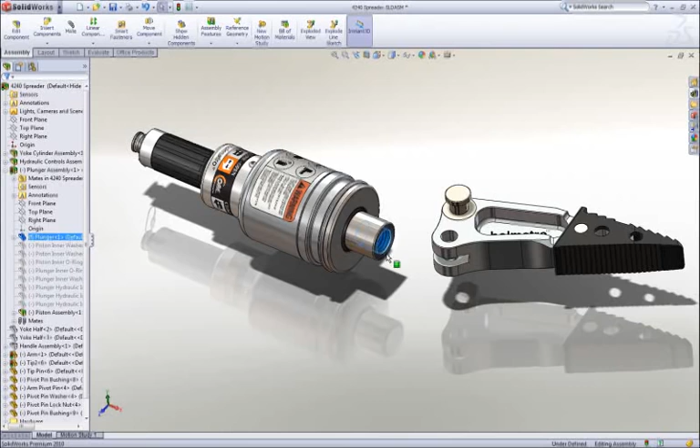We'll create a part, assemble several parts, and create some drawings. We'll start by designing a new rod end part to connect the piston rod to the spreader arms.

The basic building block of a 3D solid model is a sketch, and sketching in SolidWorks is extremely easy and intuitive. Using a mouse gesture, I get access to my most commonly used commands. Draw a slot, add some dimensions to establish its size, and then drag the center of the slot onto the origin to locate it.

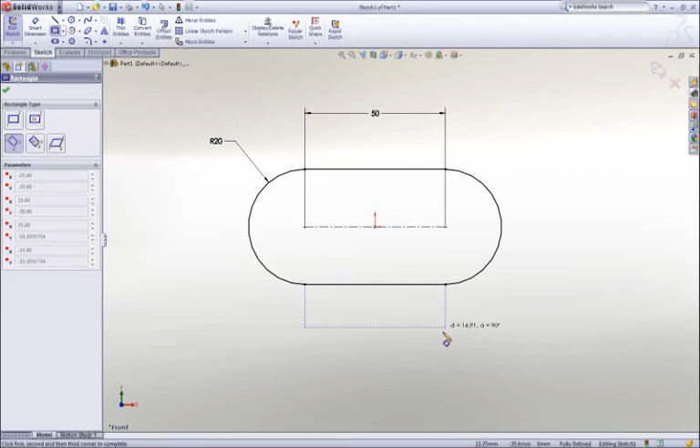Next, a rectangle is drawn using one of the many sketch tools, and then we will add a couple of circles to hold the link pins. The two circles should be the same size, so a quick window selection reveals a pop-up toolbar and an equal constraint is added to lock their size together.

Notice that as I work, all of the commands and tools are right at my cursor. We call this our heads-up user interface, which is designed to keep your focus on the screen to make you more productive.

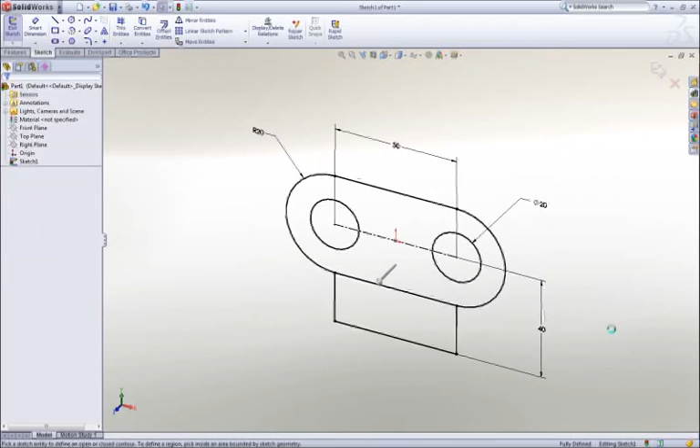Now that this 2D sketch is finished, let's make it 3D by extruding it. It can be extruded in either direction, or in this case we will extrude it 40 millimeters about the midplane.

To smooth some of the sharp corners, we can add some fillets. Their size can be graphically manipulated on screen, or we can key in a dimension to add some precision.

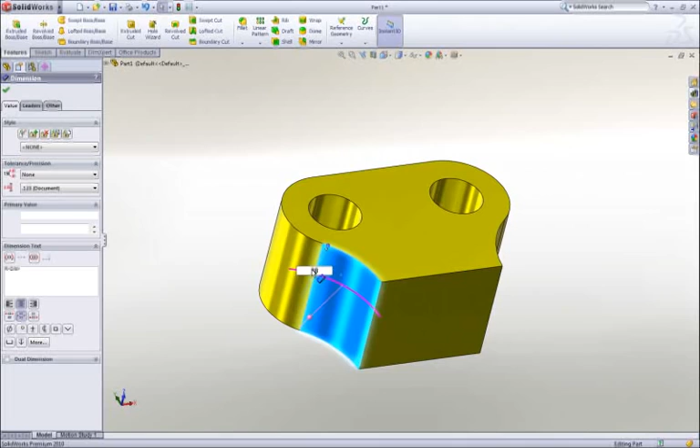Let's add a pocket to the center of the part to accept some links. This time we will use a center point rectangle to capture symmetry while we sketch, and a dimension to control its size.

Using instant 3D technology, we can add material by dragging the sketch away from the part, or remove material by dragging into the part.

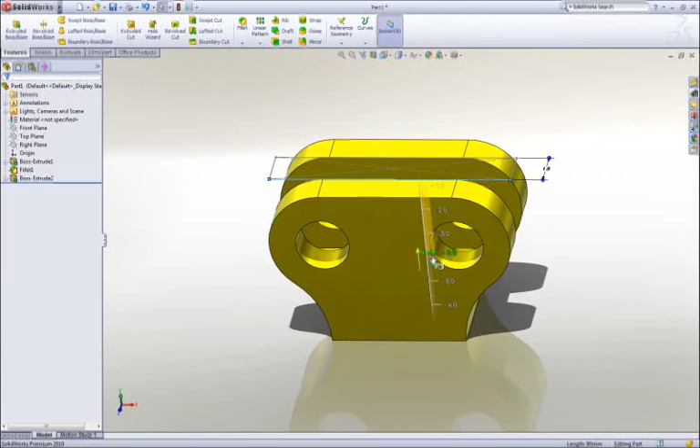The sharp corners at the bottom of the pocket can be rounded by adding another fillet. 2 millimeters would be good.

Finally, we can ease the outside corners with a chamfer. Using the on-screen feature callouts, we can easily control its size while we create it.

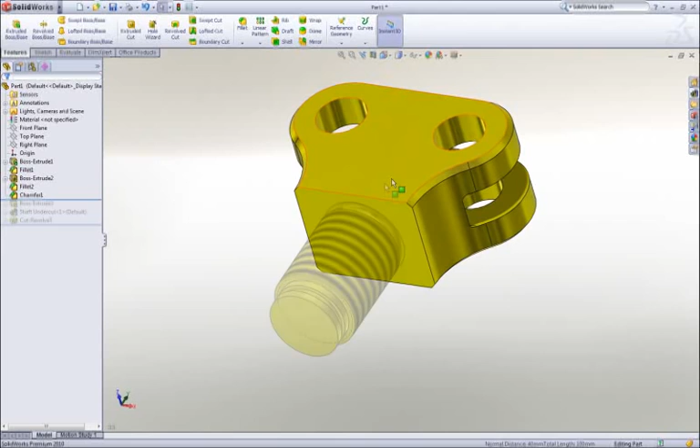Now that you have the hang of it, we will jump ahead a couple features and add a tapped hole at the bottom using the hole wizard. Gone are the days of looking up hole data, because all of the hole types, standards, and hole sizes are available. Choose the hole parameters, locate it, and SolidWorks takes care of adding all of the proper information to define the hole.

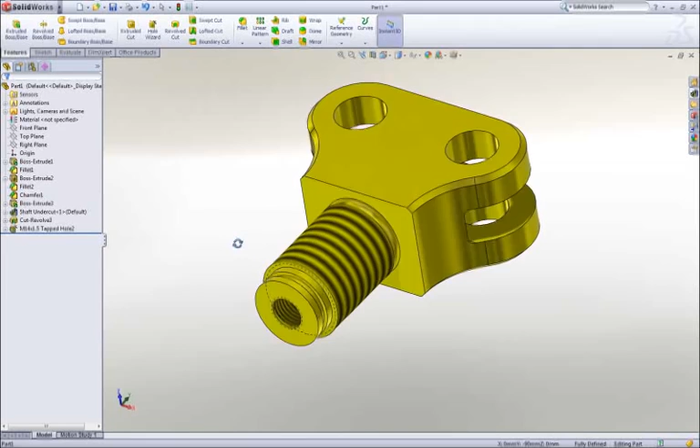Let's leverage our previously created chamfer by dragging and dropping it onto the bottom edge to make a copy. The part looks good, but maybe a couple of changes would help to refine it.

Changing the dimension value changes the geometry, and using instant 3D technology, dimensions can be dragged and we get real-time feedback of our change. It's important that we fully describe our part beyond just the geometry.

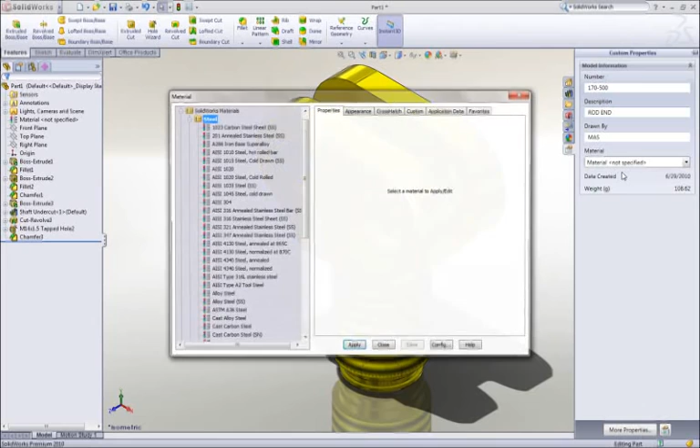Properties such as part number or description can be added and leveraged later in the drawing title block and BOM. Materials can be applied from a list of favorites or from a broad database of materials.

All visual and mechanical properties are applied. Notice that the weight of the part has been updated to reflect the new material.

To document our design, let's create a drawing. SolidWorks displays the default views of the part in the View palette. We simply drag a view onto the sheet, then we can create any desired projected views, including an isometric.

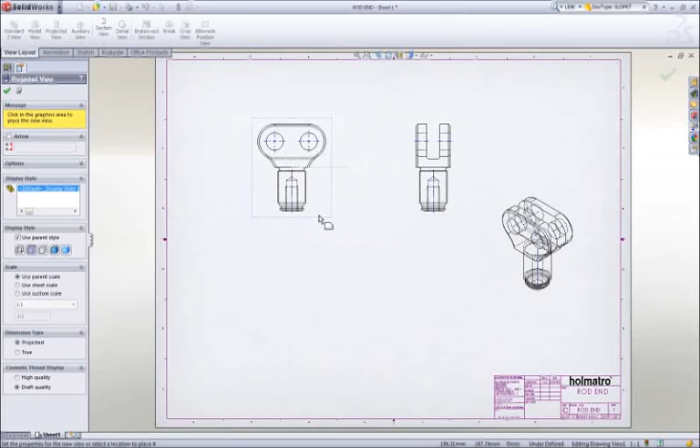Hidden lines can be removed or views can be displayed as shaded. For this part, it would be desirable to create a detail view of the area near the bottom for clarity.

Adding dimensions is simple. All of the dimensions that were used to create the part are available to be placed on the drawing. Since symmetry was used during design, we can add a couple of dimensions to locate the round boss at the bottom. The Rapid Dimension Manipulator appears to properly place and space the dimensions at even intervals.

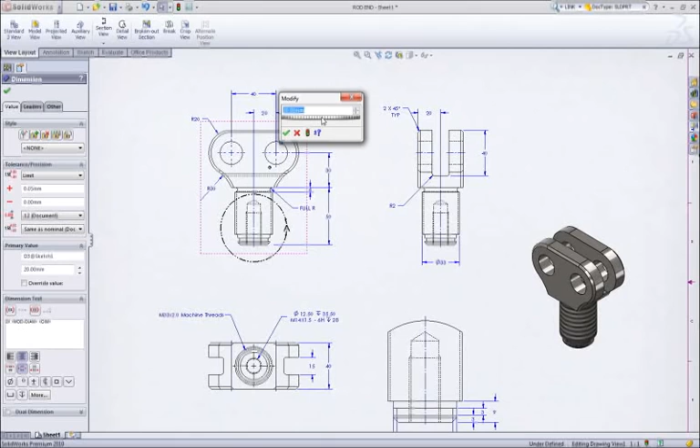Selecting a dimension, we are presented with a dimension palette where we can add more definition, such as tolerancing or formatting. These 20 millimeter holes will not accept the 22 millimeter pins we will be using. No problem—making this change directly on the drawing updates all of the views and changes the part as well.

Let's move on to do some assembly work, and with SolidWorks it couldn't be any easier. For our rod end, simply drag the round boss and drop it onto the cylinder rod. This adds a concentric assembly mate between the parts. To position it along the axis, we can drag the edge of the rod end to the end face of the cylinder rod.

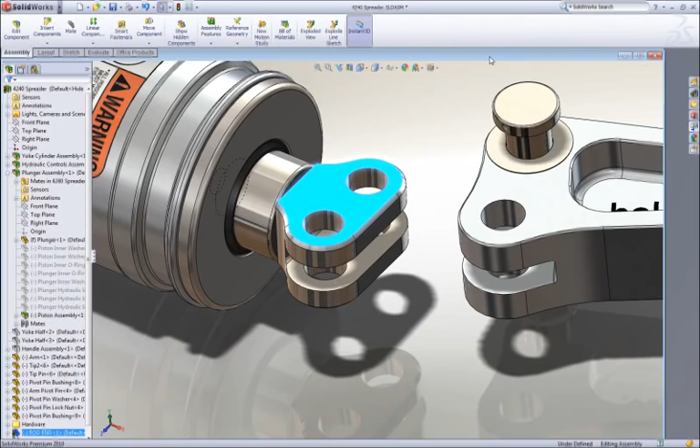This adds a coincident mate. Next, we will add a link to stop it from rotating. To find this part, we enter 'link' in the search assistant. SolidWorks not only returns components with 'link' in their file name, but also digs into the part properties to find the term. As before, we can drag this link from the search pane and drop it on a circular edge of the arm to locate it, then using the same drag-to-mate technique, hook it to our rod end.

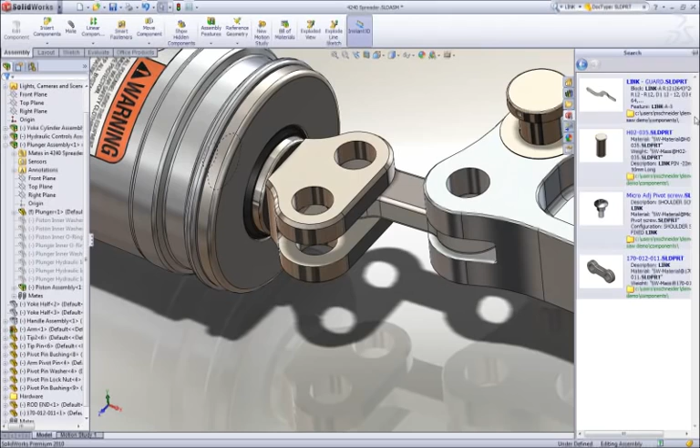From the same search pane, we can assemble the pin. This pin was modeled for multiple uses and contains many sizes or configurations. We simply choose the diameter and length desired, and SolidWorks builds the part to specification.

Most assemblies contain many hardware items like screws, nuts, washers, and the like. SolidWorks provides a toolbox of such items, containing thousands of parts with millions of configurations, for your use. Notice that as we assemble the snap ring, it automatically sizes itself to the shaft on which it's placed.

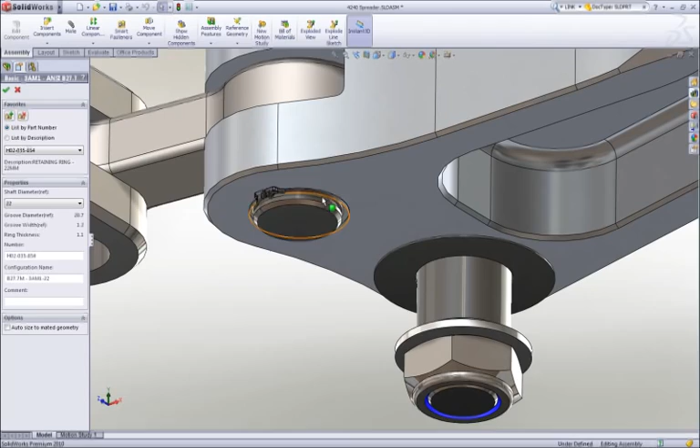SolidWorks allows us to copy parts along with their mates, which is a big time saver. Simply identify the hole and mating face for each hole where the pin is to be placed.

As you can see, these pins are too long for the rod end. Remember, the pin was modeled in multiple sizes, so we can easily change the length of just these two without having to reassemble.

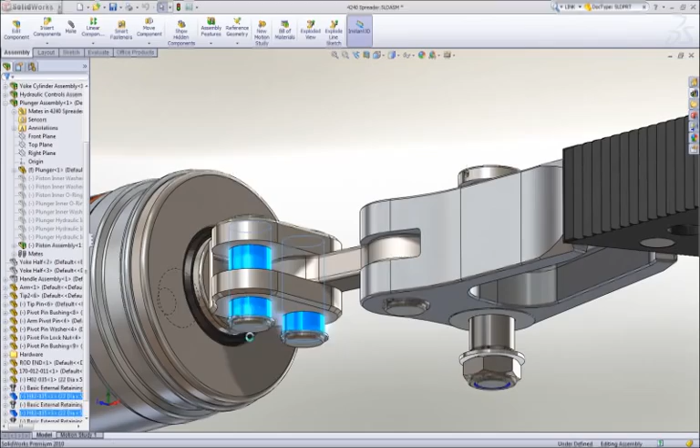Interference detection is an important aspect of 3D design, and SolidWorks takes it a step further with real-time collision detection. Notice that as we move the arm through its range of motion, it interferes with the link. SolidWorks provides both visual and audible feedback of the collision.

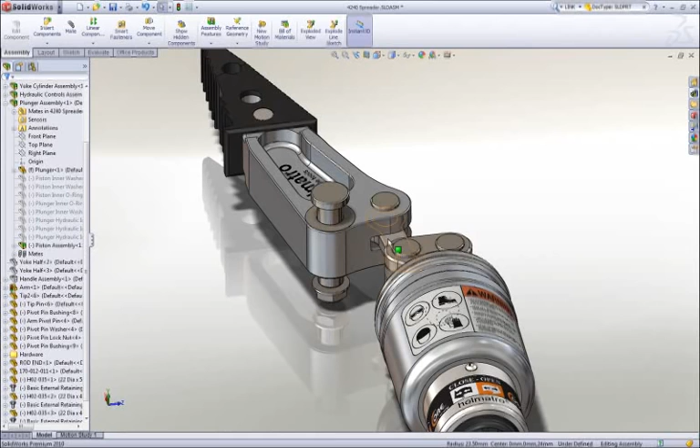A change is in order, and it can be done directly on the part, right here in the assembly, by changing the angle dimension defining the pocket on the arm. Now, as we recheck for collision, we can see that we have full range of motion with no interferences.

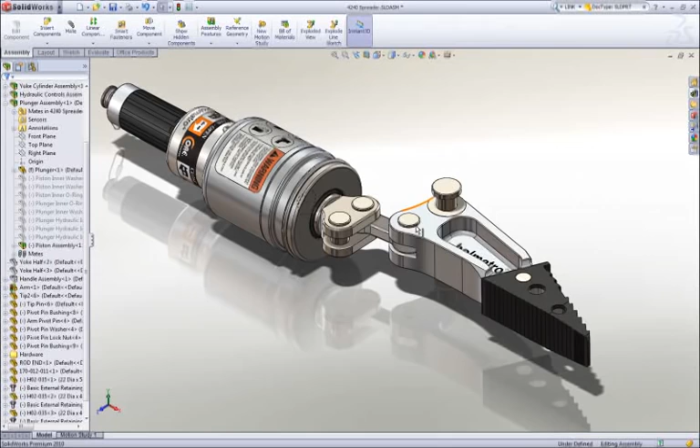Half of the spreader is complete, and we can save assembly time by mirroring the parts about the central plane to the opposite side. SolidWorks allows us to verify and change the position of each part, and even to create opposite-hand versions of individual parts.

In just 2 minutes, there were 19 parts added to this assembly, and our assembly task is complete. Let's turn on the parts we previously hidden and document this assembly.

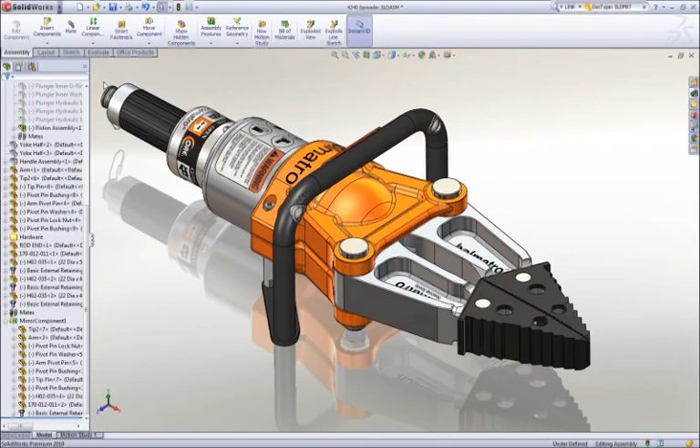We'll wrap up the demonstration by creating an assembly drawing. As we did when creating the part drawing, we can drag the required views onto the sheet. To better describe this spreader, we will use an exploded view of the assembly.

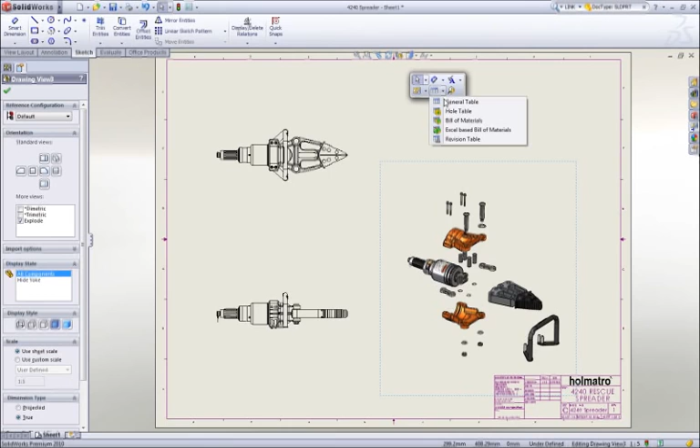No assembly drawing is complete without a bill of material. SolidWorks itemizes the parts, extracts information like description, and adds the appropriate quantities. No bill of material is complete without balloons, and they can be added automatically.

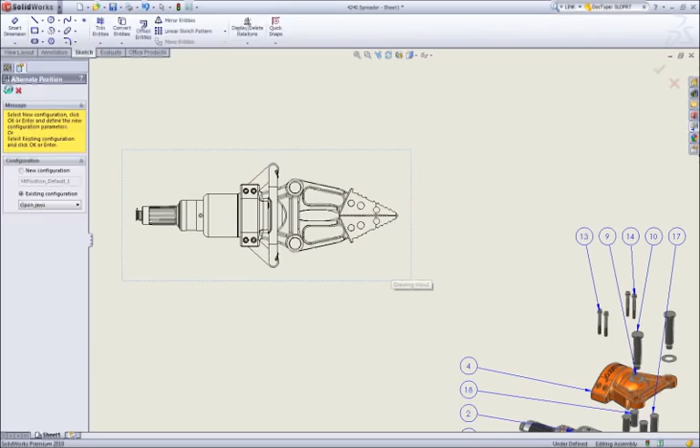To depict the motion of the spreader assembly on a 2D drawing, we can add an alternate position view to describe the assembly in both the open and closed positions. Add a couple of reference dimensions, and our assembly drawing is complete.

We strive to deliver simple but effective tools to help you design better products faster. When you have an idea for a great product, SolidWorks provides the tools to design it in less time and at lower cost. This has been your first look at SolidWorks. To learn more, contact your local SolidWorks reseller or explore our website for more information.